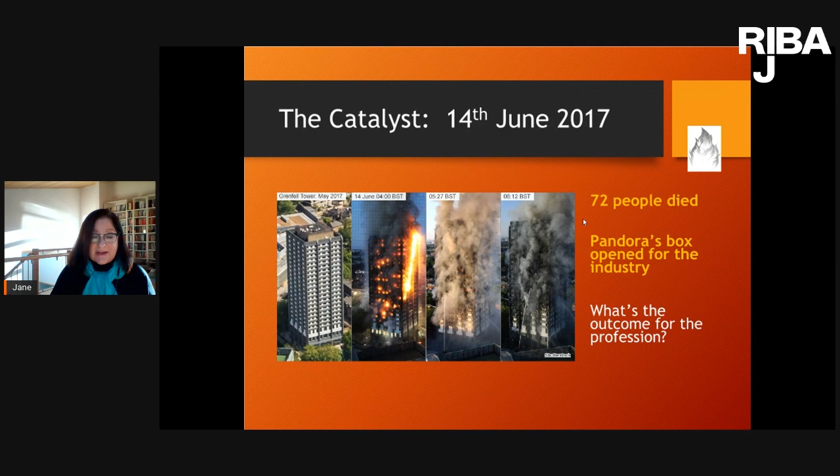So the background to this event, obviously, is we started a year ago with a roundtable discussion, a fantastic discussion with a very broad cross-industry group, and three issues emerged: PI insurance, still a big issue; procurement and responsibility, still big issues; competence, even bigger. So we really got it right in November 2020, and it's ongoing.

Next, please. Then there were follow-up Q&As in articles in the RIBA journal in February, March, and April, tackling each of these topics, so I hope you've read them. Insurance exclusions, well, we know about those. Shoveling off risk, and this is an area I feel very strongly about - architects actually need to shoulder some understanding of what the risk is and be able to talk to clients. And then rebooting construction in terms of its competence. Critical subjects. Let's move on.

So what is the problem? I mean, should we really be worried? Yes, we should. I put it as a juggernaut. The world for architects and most of the construction industry is changing and will change. The key changes are the Building Safety Bill, which is enormous potentially. Competence requirements for everybody in the industry, and you'll be aware already of what's happening with architects. I'll talk about that in a bit later.

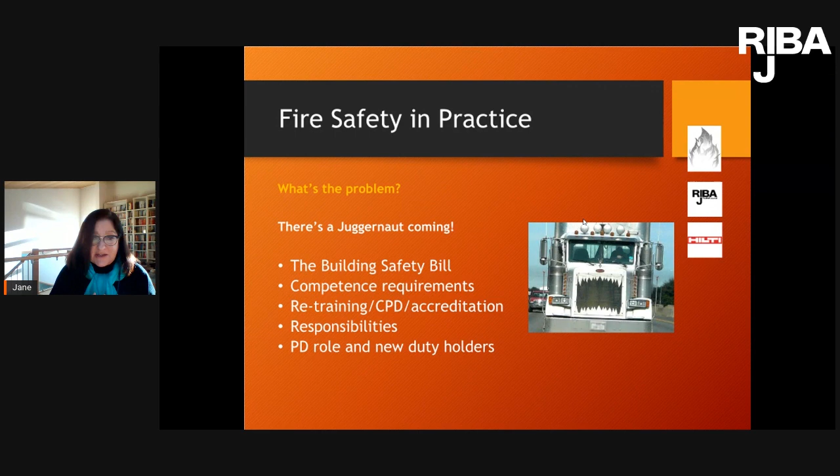So this is just a bit of quick timing for you so you understand where we are. The Building Safety Bill had its second reading introduced July this year, so not very long ago. And we've been told it's about a year until it gets Royal Assent, so probably July 22. And what we do know, of course, is that we are going to have at some point soon Gateways 2 and 3 will be explained next year. You're probably already aware that Gateway 1 has already been introduced in August this year.

Now, phase 2 of all of this is going to be about information from secondary legislation. And the issue with the Building Safety Bill is it's a series of aims, really, without an awful lot of detail. And the detail is being discussed at length. The RIBA and a lot of others are involved in that to try and make it work for everybody. But the information on that probably isn't going to be with us for a further year. And then in phase 3, for the last 6 months of 2023, hopefully no longer than that, we'll go through a transition period where the regime will be enforced and everybody's going to be feeling their way through it.

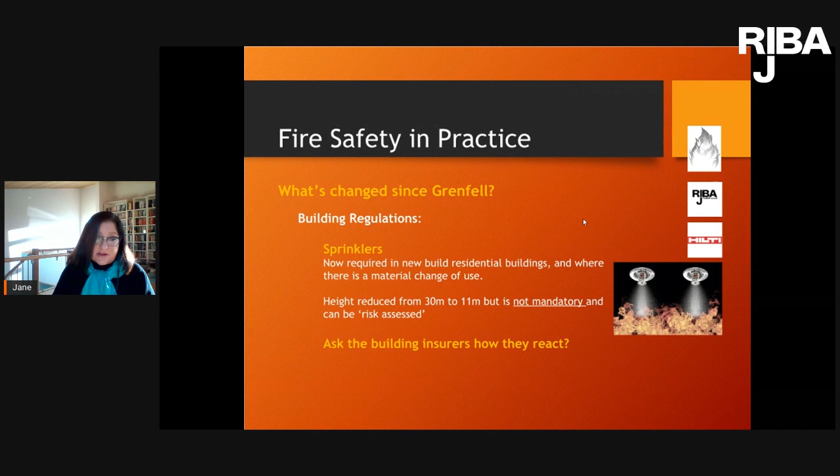And so this to me is not actually good enough. If you need to have prescriptive regulation, you can't have it not being mandatory and somebody can argue their way out of it. And we've definitely been hearing from insurers saying, how are we supposed to insure a building if we don't know whether or not it's adequately specified with protections? Next, please.

What else? Well, the stay put policy, everybody knows that was really, really difficult. It failed at Grenfell. And it's not really surprising. I've got a little photograph there of a trial where we have people coming down the same staircase that firemen are going up, and that's even before they've put their huge pipes full of water up these staircases. You can't have a single staircase, as we did in Grenfell and as are in many buildings, old buildings, refurbished buildings, and unfortunately now new buildings still going up with a single staircase. If there ever comes a time when you need to evacuate people, it doesn't work, and many people died in the stairwell, and I must say the insurers don't like it at all.

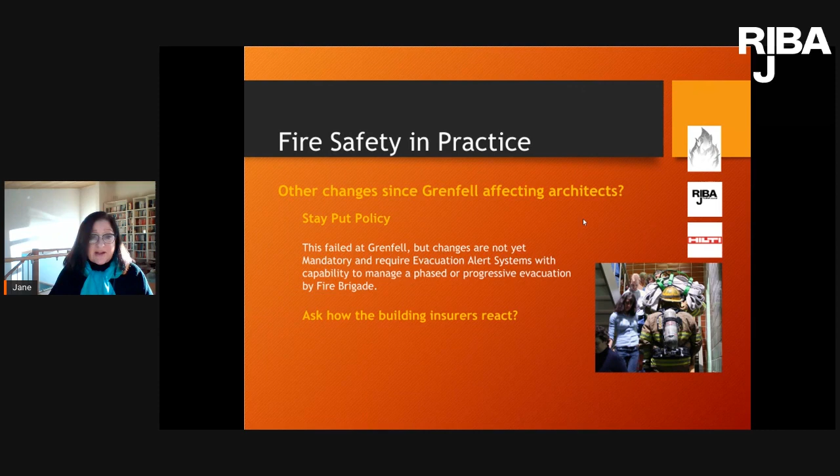And what else? Well, there's the Fire Safety Act. This actually was about having fire risk assessments for residential landlords and making sure that the flat doors and the external walls and all the common parts had a risk assessment. I mean, it's just common sense, isn't it, really? But I put the point in - he's quite right. You are going to need to have a design specification, because otherwise, how do you know what's where and what needs doing? So there's a really lot of work to do here.

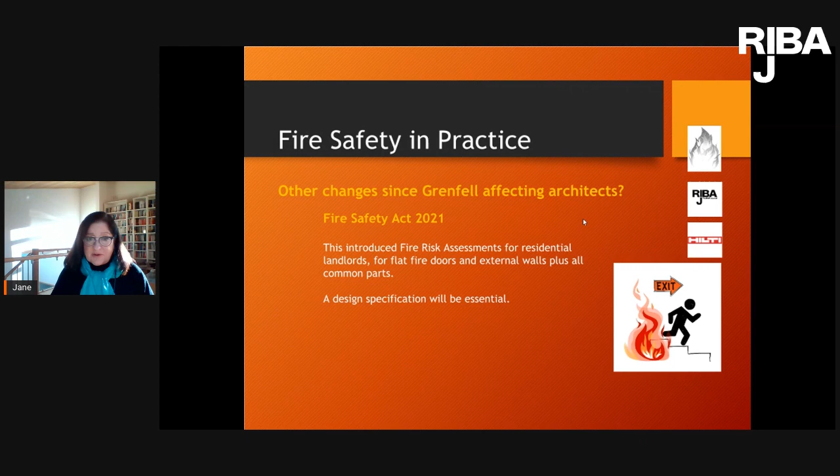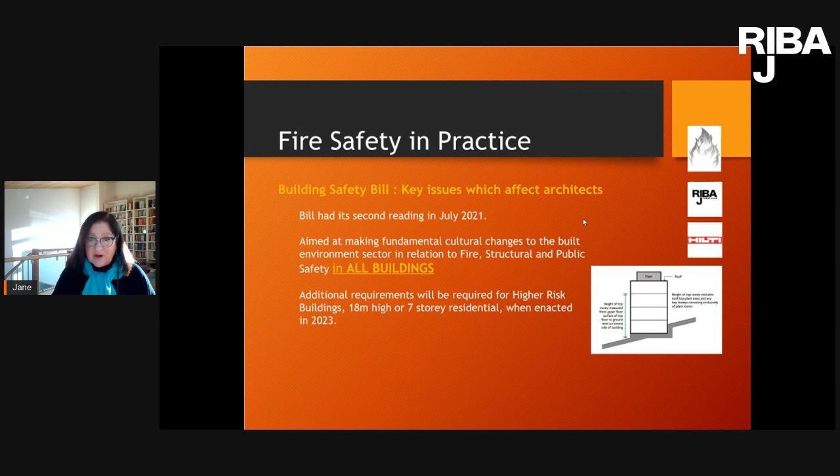And then we have the Building Safety Bill. This is all sort of sequential. It had its second reading in July 2021, and the general gist of it was making fundamental cultural changes to the built environment sector in relation to fire, structural and public safety. It's a huge thing to do. But what a lot of people don't realize is that the Act and these cultural changes were to apply to all buildings, although there are additional requirements for higher risk buildings, those 18 meters high or 7 stories above. But all buildings are really in scope of the Building Safety Bill now, so we need to be aware of this.

Well, we're at planning stage 1 gateway, which is relatively straightforward, but a fire statement is now required by legislation from August this year. But we have a little bit of difficulty because the system for the building safety regulator isn't really quite there yet. So I'm not quite sure who's going to be checking the fire statements, but presumably there's something interim in place. I'm afraid I don't know it. Maybe Paul will be of help with that one.

One of the things that came up in this July reading of the Building Safety Bill scared the pants off me, my expert panel, and a lot of other people in the industry, because they were proposing to adopt changes to the operation of the Defective Premises Act. It seems to make some sense unless you read the detail, where it's allowing owners and leaseholders to literally sue anybody connected with provision of a dwelling not fit for habitation. So this is everything: refurbishment, works to homes, not just new homes but existing homes, change of use to homes, and 15 years worth of house alterations and extensions were and are in the frame.

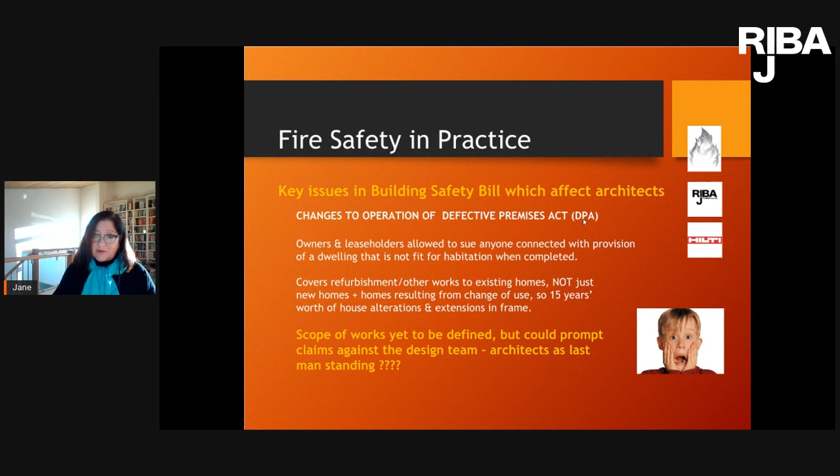But we haven't yet got the scope of works defined. We're very worried this could prompt claims against the design team. I've been personally involved in one scheme, luckily not too many, where as architect for a project I was literally the last man standing. Everybody else had disappeared off the face of the earth and collapsed their businesses or whatever else they needed to do. And although none of the requirements of this were directly pointed at me, my PI insurance had to cough up because nobody else was there. I can see this happening unless something changes with the Defective Premises Act. It's pretty scary unless we can change it.

So this is the key thing everybody's worried about. Everybody's practices are having a bit of a hiccup. No doubt you've been affected, because I think everybody has been. If it isn't just the rates, the insurance going up, it's the ability for practices to get the right insurance, and there are lots of exclusions, which I find totally unacceptable. But of course, if we've suddenly got to have 15 years for claims to be dealt with, and this is retrospective from next year, I've no idea how that's going to be coped with, and I hope the government will listen and just say you can't do this, it's not possible, because it's going to have a huge impact on our liability and ability to practice. So I think this really needs some thought.

You can see we're in a bit of turmoil with all of this, but there's one or two things we know are going to happen. The ARB is going to have a different role. It's interesting—they're going to have new powers from government to monitor and assess the competence of architects all the way through their careers. They're talking about a 5-year refresher test from 2023. I think we'll all probably retire by then, won't we? With possible deregistration as an ultimate sanction if you don't do what you're supposed to. And they'll have powers to publish disciplinary orders against an architect, taken by the Professional Conduct Committee. It's not dissimilar to what's happening now, but the government have been working with the ARB to determine the length of time a disciplinary order can be listed on the register. And of course, that does affect people's livelihoods.

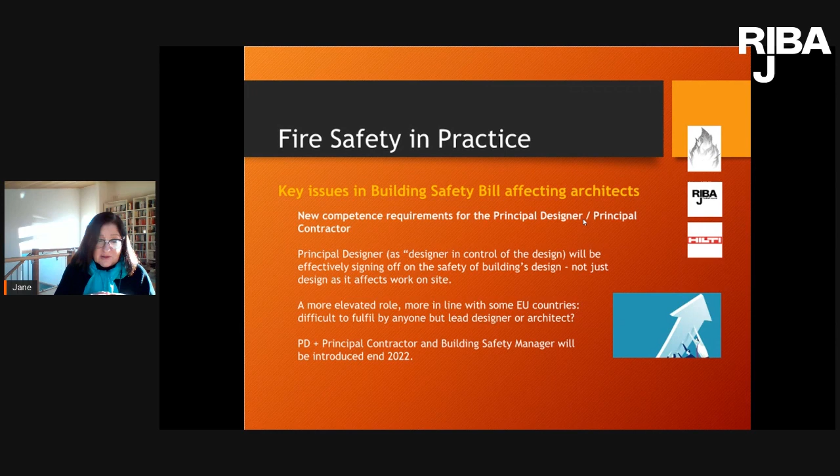So, what else is coming in? Well, competence. Competence is one of the biggest issues in my book, in particular with the principal designer and principal contractor, but actually competence is a bigger topic than that because it affects everybody in the industry. And I think although everybody's talking about individual professions or individual roles and the competence required for those, there's another one we could talk about, which is competence in terms of collaboration. How do you become competent in managing other people to the point everybody is working together to bring truly professional management and an end product which is fire safe and keeps the public safe? Difficult topic.

So it's really going to be tough. This is just a really quick view of it, but it is going to be a difficult one for architects. Actually, it's going to be difficult for everybody. Everybody's going to need training. There's going to be the building safety regulators with oversight on everybody, and we've all got to do our CPD.

Everybody in the industry has got to look at procurement. The issue is the procurement is quite simple. I mean, the difficulties with procurement have, in my view, driven down costs to the point where quality has gone out the window long ago. That's got to come back.

We've got to have smart procurement, sensible procurement that will make sure that the buildings that are created or amended, adapted, retrofitted, whatever's going to happen to them from now onwards are actually fit for purpose. And purpose means not just that they're going to make enough money for their developers, or be cheap to run, but will actually be a legacy and be safe into the future. Otherwise, the insurance industry is going to turn their back on us, I think.

Right, next slide please. I'm nearly finished.

This is something that my expert panel at the RIBA is very keen to keep pushing the government on, which is the need for clear, prescriptive regulations, a baseline everybody has to follow, without the potential for people to worm their way out by using parts of the guidance which are not clear, or bringing in specialists to do special computer packages to mean you don't have to follow regulations. I don't know how people have managed it before, but it just seems to have become the thing.

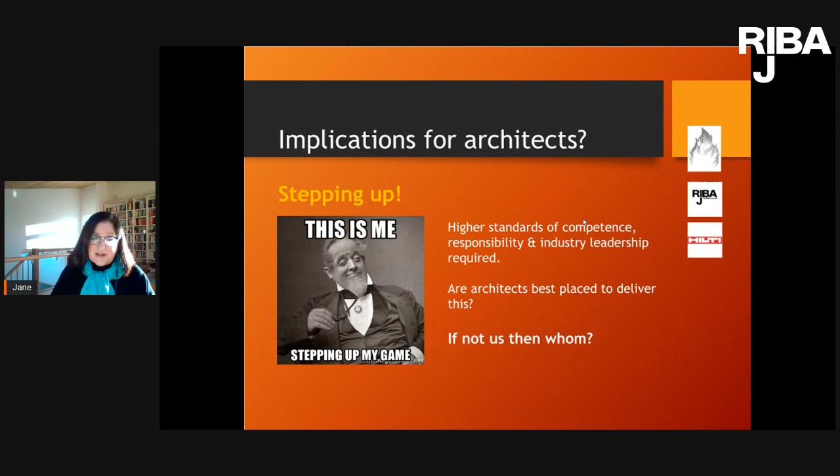So there's lots to talk about here. Let's discuss it. Thank you very much.

Thank you so much, Jane. I always really enjoy listening to you speak about this legislation that's coming into play, which is underway, and really being able to draw the audience's attention to it. These are very, very important changes being made to our industry.

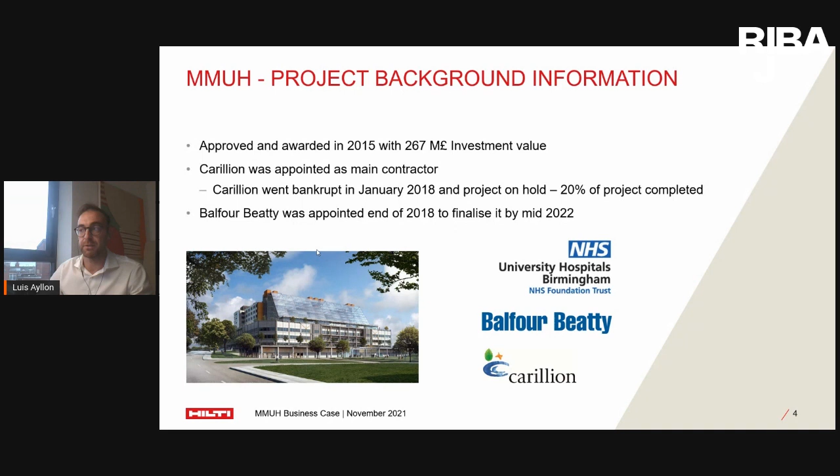In terms of the different parties involved on that project, and currently still involved since it's not finalized yet, as an architect and principal designer in this case it was HKS, Balfour Beatty as main contractor, and Curtins Consulting as structural consultant. I'll try to reflect why I'm including the structural consultant here as well.

In terms of Hilti, how did we get involved as a manufacturer? We got involved at the beginning of the project, and then decided with the main contractor and the architect what the scope of works would be. A very early definition was quite important to come up with a successful outcome from the work put together by the different parties.

Going strictly onto the design stage, what was different? From the main contractor's point of view, it was agreed with Hilti on the definition of the boundaries before the M&E or services design was carried out. I'll explain this in more detail, which will give you better knowledge of what I'm talking about.

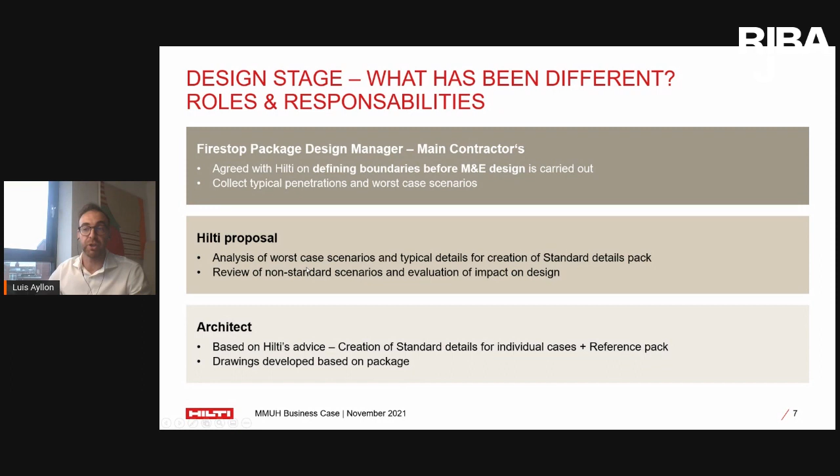Then, looking at the traditional design flow when it comes to mechanical and electrical, focusing on overall fire protection - when it comes to the normal or traditional flow of the last years, which is slowly changing in the industry, we start with the concept.

What is the number of services that we need for the project? That's based on the different service types, the number of beds needed, what the waste and consumption will be, and other specific requirements.

Then we move on to what type of services we'll need - number, type, size, volumes, etc. - and then how the main corridors and plant rooms are going to look. That's fairly common and fairly easy to start the design for any single project, whether residential, hospital, etc.

From there we move on to a spatial and openings configuration, and we define - or traditionally have defined - the multiple services penetrations with the supports, pipe and cabling needed for electricity, and then roughly figure out what the opening sizes will need to be in these cases.

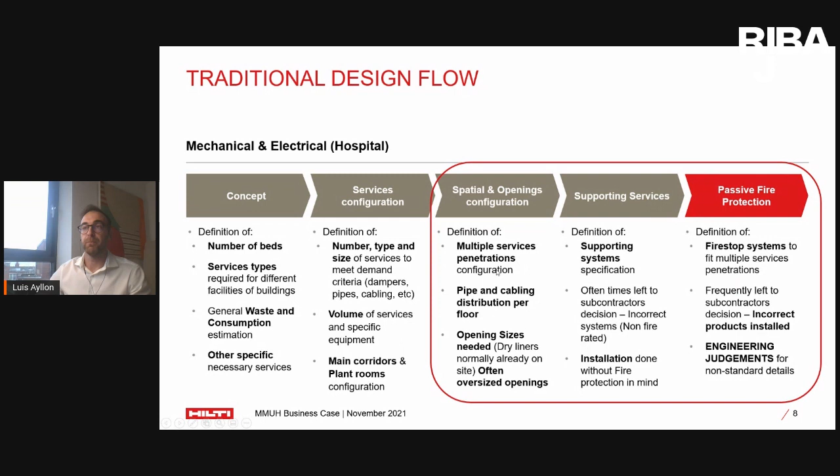So far this has been a traditional design flow. What's been different in this project is that we went all the way through from the concept and service configuration, which was part of the traditional method as well, but then moved passive fire protection design from the bottom of the chain to the intermediate stage, agreed between the main contractor and the architect.

That was to actually define the boundaries - what are the limits of the products, what is the product tested up to, how big are the openings covered by those products. We set those limitations, then produced solutions and identified which were the possible ones.

From there we started to define how the spatial configuration and openings on site should be limited to, in terms of openings no larger than a given size, and no more services grouped together than specified. Those are the ones that go after the design or selection of these passive fire protection elements.

Last but not least, the supporting systems we use to put all of this together. Of course all those supporting systems need to be according to fire requirements, so they need to be fire-rated supporting systems as well. Installation has to be done according to the passive fire protection manufacturer's instructions, and also according to the supporting systems manufacturer's instructions.

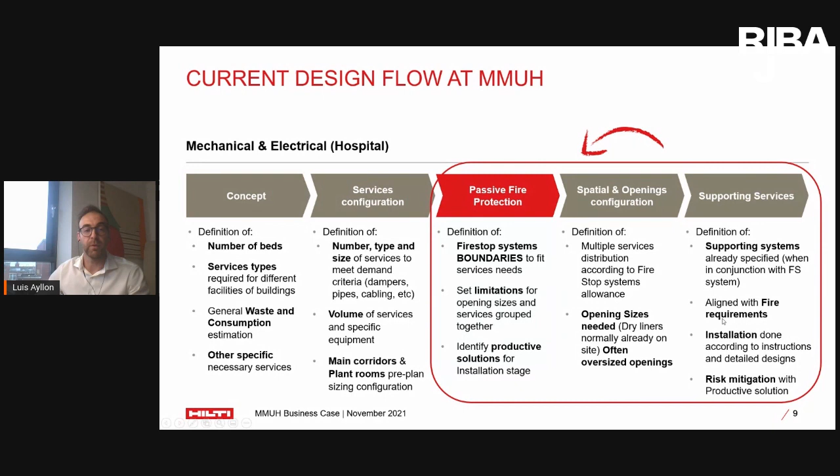That was the last part of it, from which we could evaluate and run a risk mitigation exercise to understand the different parts and make sure we don't end up with as many engineering judgments as we had in the past.

So in essence, starting with a clear definition of passive fire protection boundaries - the limits, what falls under the standard detail, what falls under products that have been tested - we can then make sure the mechanical and electrical design fits onto those fire stopping limitations.

Then together we reach the final stage where we see that 90% of the applications, 90% of the penetrations, can be covered with a standard detail, with an element tested for this application. We take all of this forward - this 90% is correct. Then what happens with the remaining 10% not covered by the current testing data we have for those products?

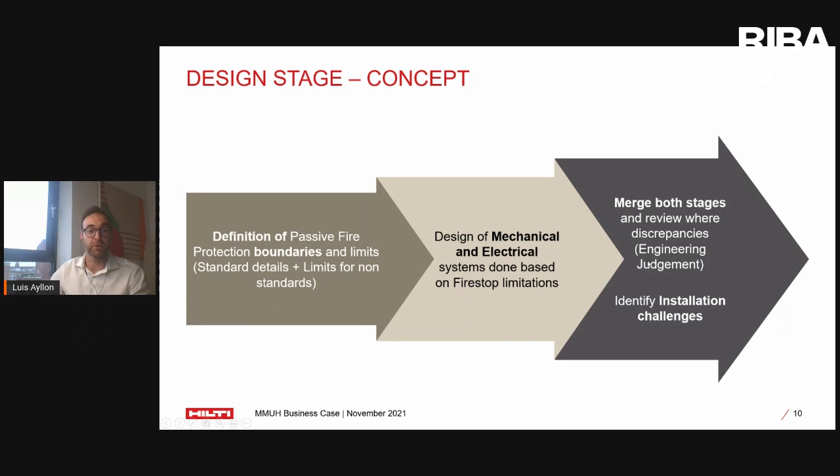That's how we came up with this standard detail spec that we put together for the architect and the main contractor. We defined it starting with single penetrations, and also for flexible wall systems, plastic pipe, metal pipe, always giving different options for different types of pipes and elements, and materials for cabling too - giving a couple of options with a figure or number reflecting these standard details, so we can refer back once we move onto detailed design. Same for concrete wall, single services, multiple services penetration, and concrete floor as well.

Here, without going into too much detail, I refer back to the structural engineer, who will probably also have to be involved in some of those risers where services have to be fire stopped, and where the fire stop manufacturer has to work with the architect and the structural engineer to come up with a solution.

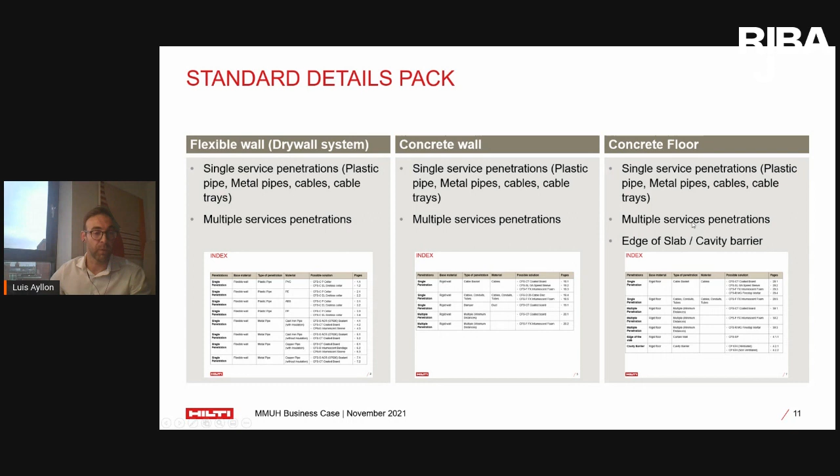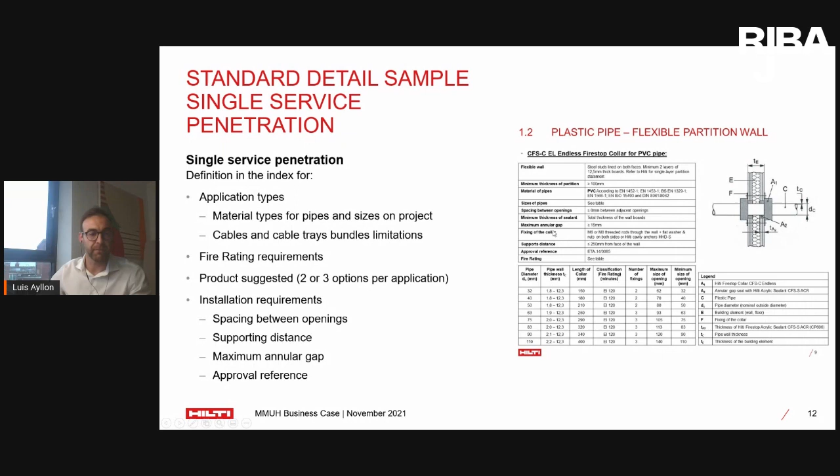Early engagement is also something that will save a lot of engineering judgments and remedial solutions further down the line. As an example, you can see here what one of those standard details looks like. Those standard details were used from the architect going through the main contractor and also all the way through to the installer, because it contains all the information needed for the different types and sizes of pipes, the approval reference, supporting distance, maximum - in essence, all the necessary information for all the different parts involved.

Looking at how a multiple service penetration would look like, we would take one example, and we would define all the different conditions that have to be met in order to actually be able to implement this standard detail in a possible opening that we would have on site.

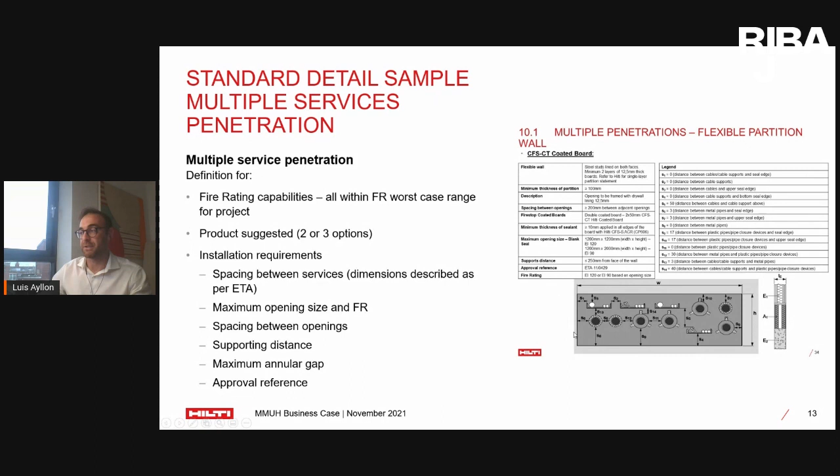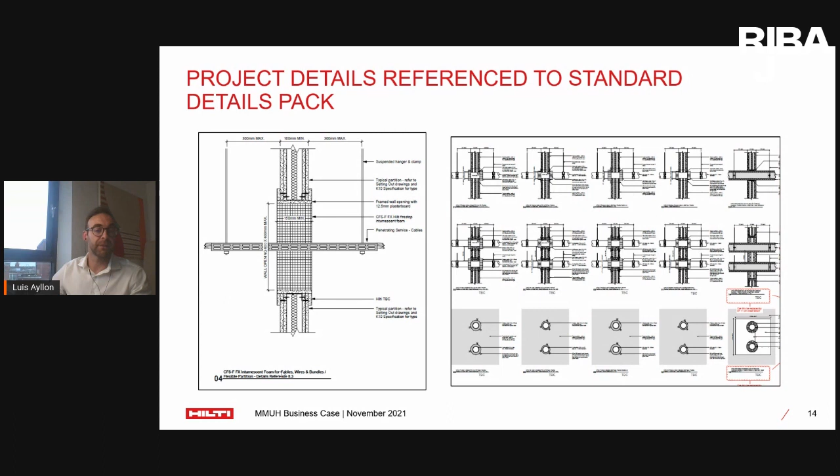And that's how then, moving on to the detailed design, is being referred back. So this is an example of specifics about the project that are being referred back to this standard details pack. So everyone, again, from the architect, main contractor, and then subcontractor or installer, can refer back to any detail that they will need during the installation time, for example.

Now, non-standard details, and here's where this 10% comes into the scene. By actually getting early involvement onto the design, we've managed to move from roughly half of the applications being remedial solutions to roughly 90% of those applications being standard tested details, standard applications that we don't have to look onto engineering judgments for.

But there's always things that have not been tested that will go out of the normal scope and cannot be met with the current testing data that the manufacturers have. That is where we can come up with something specific that can meet the worst case scenario for those situations with multiple services, with dampers, with movement, etc., where we can put an engineering judgment together, evaluating and assessing the situation, and also provide a full system approach.

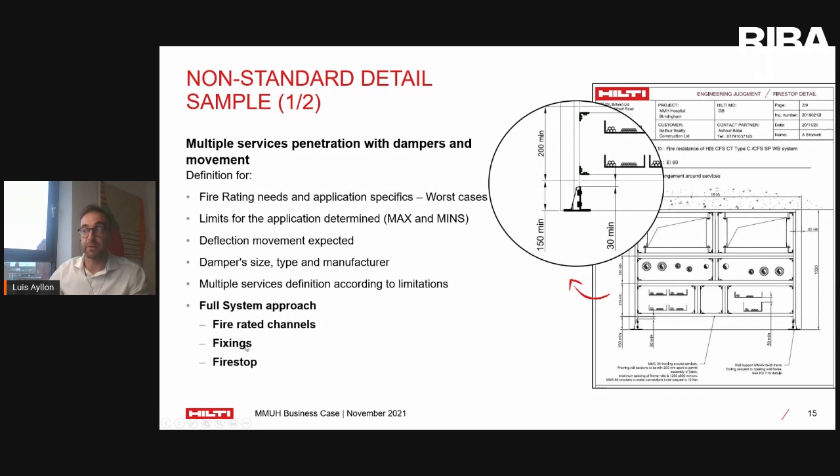That means that, for example, for this type of application, which is an above-door system penetration, where you've got dampers, you've got deflection movement, pipes, cable trays, etc., we can come up with a solution which is fire compliant. It also has fire-rated channel systems, which is also compliant with the fire requirements, and also fixings, because fixings have to be fire-rated to have a proper fire-rated overall application.

And that's how, for example, we would deal with movement in this case, putting some movement accommodation with specific products that, based on test data or test evidence that we have as manufacturers, we can come up with a solution. That is always proposed by our fire engineer, and that's something that goes through an exhaustive process of checking and review.

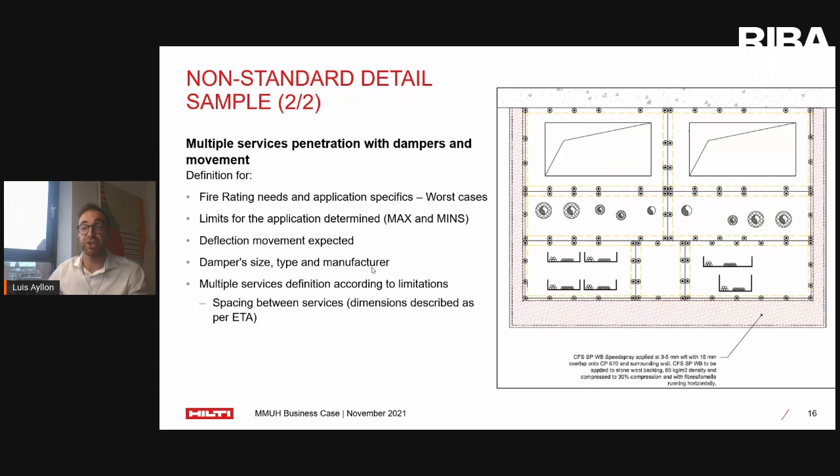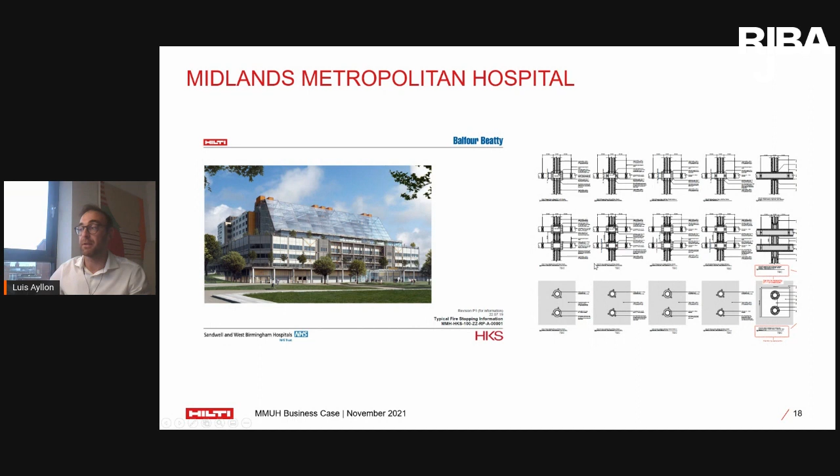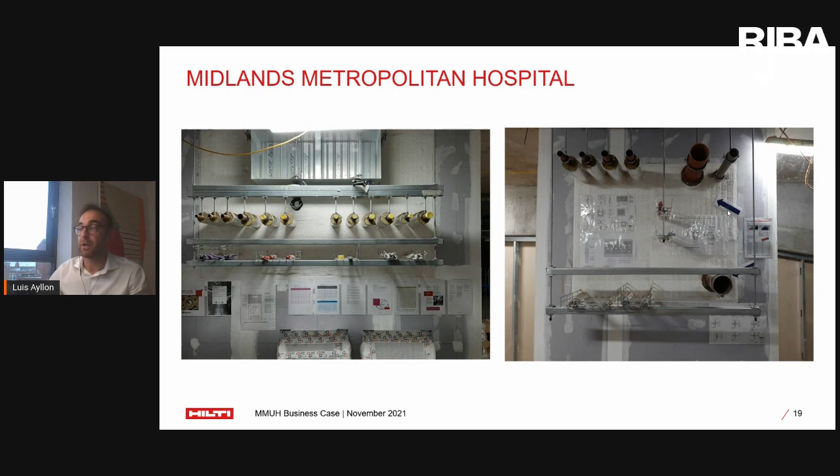Results. Again, going from the design, that was the standard details pack, specifics for the different applications, the different locations on site. Then mock-ups that were created on site with the specific details referring back to this standard details pack. So everyone who had any question about how to install something could refer either to those mock-ups installed on site, or go back to the standard details pack because there is a specific reference in this detail. Going all the way through to training as well.

I think I can spend an extra minute emphasizing the fact that Hilti as a company, we haven't been doing this for just a couple of years. We've been working with yourselves, with architects, for many years, way before the tragic events happened a couple of years ago. We've been working that way, trying to collaborate with architects, getting involved in early design stage with main contractors.

Now, more and more main contractors want to do this early engagement with Hilti or the fire-stop product manufacturer in this case, and also even clients, even the proper clients or owners of the buildings - they are the ones that want the manufacturer to be early on involved on the design stage, so everything gets designed properly, and then we don't go further down the line and try to use remedial solutions for things that could have been avoided early on. And that's it from my side.

I hope that it's been brief but useful for each one of you. I think the key takeaway is about changing the mindset of not letting fire protection be installed, designed, or determined at the end of the chain, but taking fire protection as something that limits the way we do most of the design in a building, dictating how the services should go through so they fit within fire test data from a specific fire protection material.

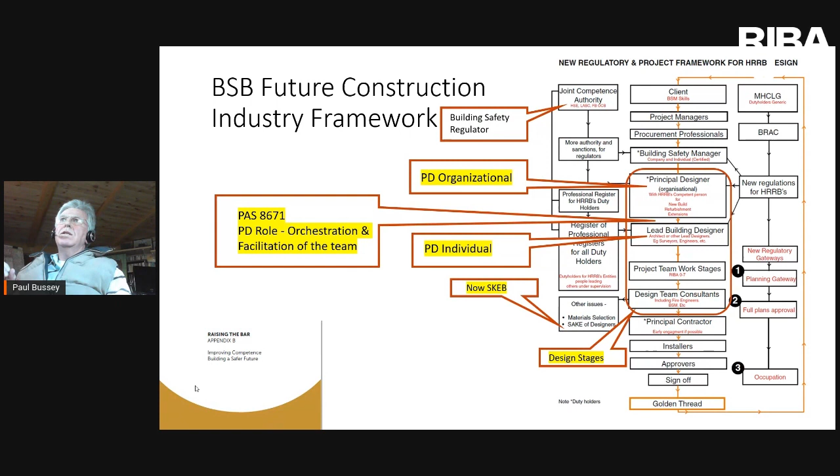Jane mentioned the Building Safety Regulator. They are currently forming themselves, and they need 700 new appointees - they've apparently got about 100 to 200 so far, so there's still a process ongoing. Currently, local authority, HSE in theory, and the fire brigade are all supervising what's required, together with approved inspectors who are coming in to help with that process, because there's a lot of expertise out there. So increasing visibility during the next year, relying on the local expertise of the regulators that are out there. They're all getting trained up, I assure you, to higher levels.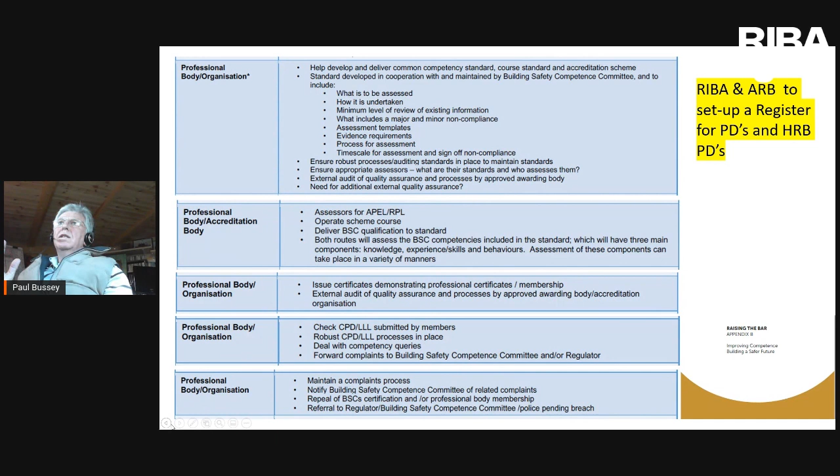Architects will need to up their skills, knowledge, experience and behaviours. It used to be SCET with training in CDM, but they've dropped that. There's still training required, but behaviours is fundamental, and people have to demonstrate that they are competent. That is the point - not just to say you are because you're an RIBA member or you've passed your Part 3, you've got to keep up with those standards. So there's these expectations of everybody in this overarching competency framework.

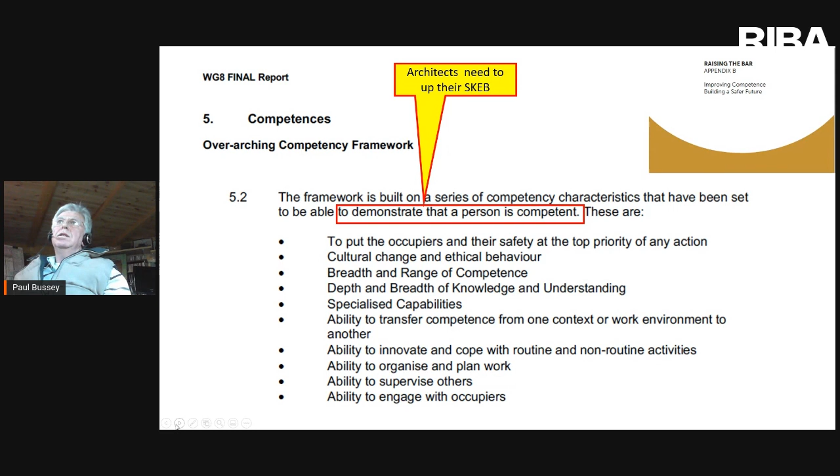So the way ahead, again Jane mentioned this, and you'll see down the right-hand side there that we're looking at actually getting health and safety wellbeing with the general level for architects, and then advanced study for all buildings, RIBA Principal Designer course, and then there's a Principal Designer for HRBs, which has some additional expectations. It's not that many more, to be honest, so the expectation on all buildings is pretty high, and I think there's 3 extra duties for HRBs - higher risk buildings, which will not only be necessarily 18 metres and 7 storeys, etc.

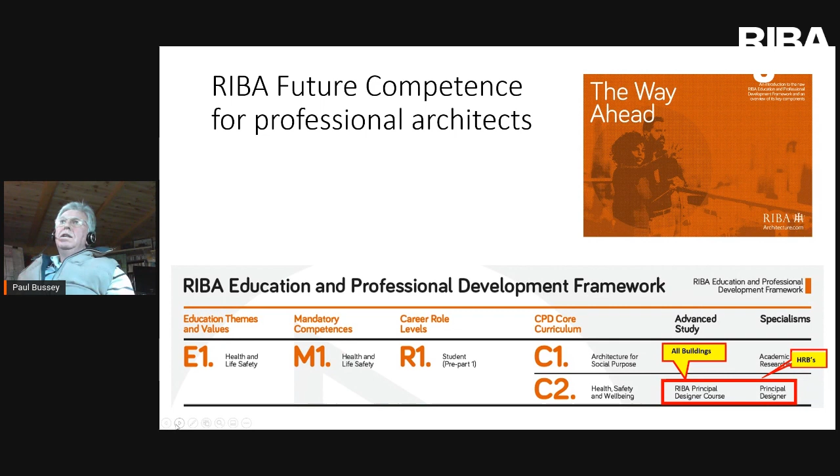So Building Safety Regulator, as I say, the new name, it was originally the Joint Competent Authority, and Peter Baker is heading up the organisation.

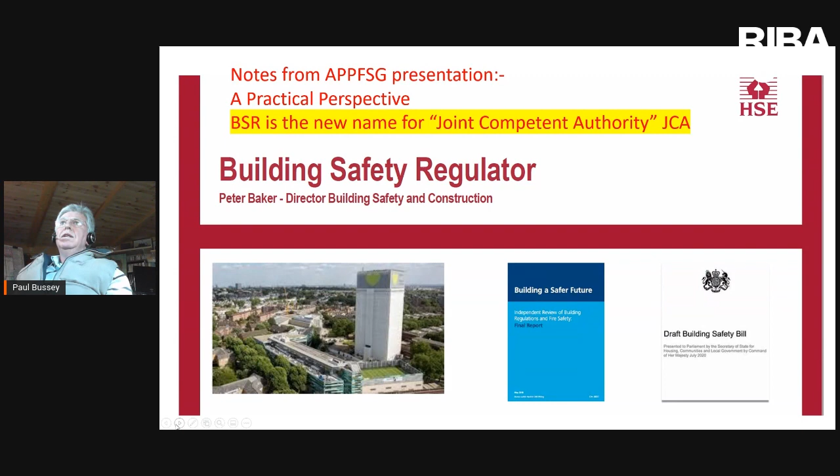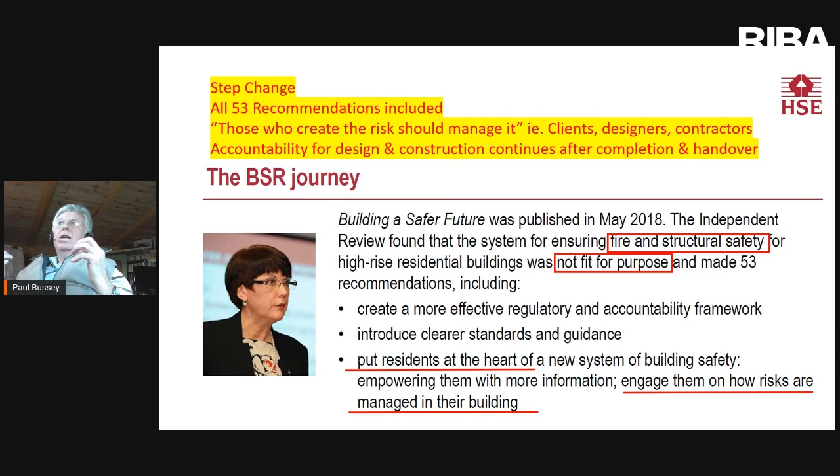So the HSE are really driving this, and all 53 of Dame Judith Hackitt's recommendations have been or will be implemented. And there's a famous quotation, she states, that those who create the risk should manage it. And her view is that clients, designers and contractors do so, particularly clients and designers in a way - we're creating something which has risks embedded. We need to identify these and manage them, particularly in terms of fire and structural safety, because currently the whole process is not fit for purpose, and putting residents at the heart of this process.

So there's an interim industry competence committee, which I've been representing the RIBA upon. We're getting there - it's quite a slow process because everyone thinks they know how other people should be competent. It's more difficult when you've got to do it yourself. So I'm really backing the architects within this group to try and make sure that we don't have the bar set too high. It's going to be a wide bar.

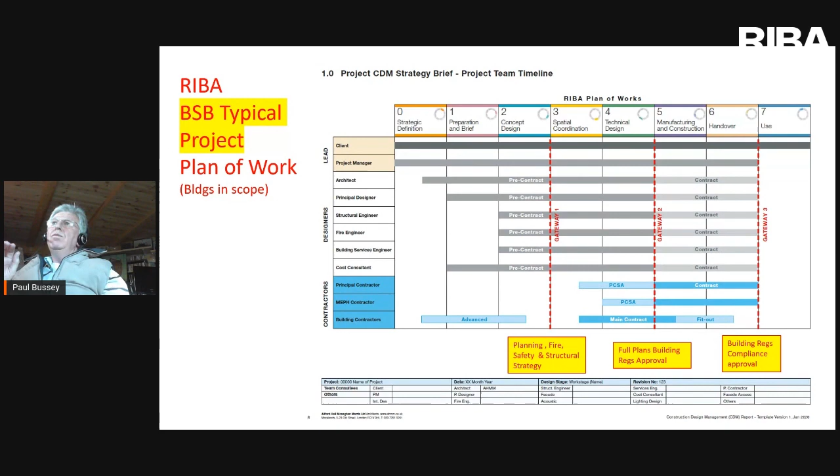So this is a little flowchart which just tries to show, in relation to the plan of work, what Jane was talking about - procurement, and trying to get within these new gateways, which in theory might well apply to all buildings in the not too distant future - but actually getting all the consultants appointed at an early enough stage to make sure they can meet Gateway 1 with a good standard of fire safety and structural design. And then Gateway 2 is going to be the next critical stage where we're going to have to get contractor input in. And I think everything that Louis has been showing us has got to come before that Gateway 2 dotted line, because we're going to have all the services designed to a suitable extent to be fire stopping them in the design that Louis has been showing.

Because after full plans approval, there should not be design change. Now, that will be interesting to know how that is going to be adopted, particularly under design and build. But we certainly know that by Gateway 3, that's got to be all sorted out. There should not be design change from fire and structural safety during that 2 to 3 work stage.

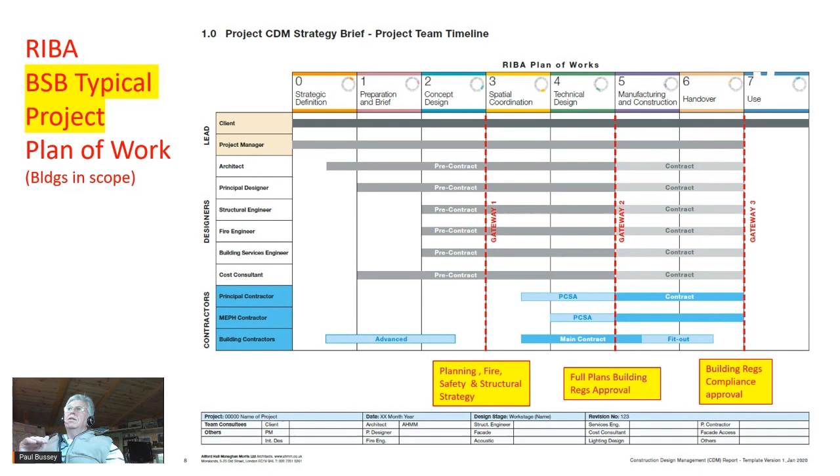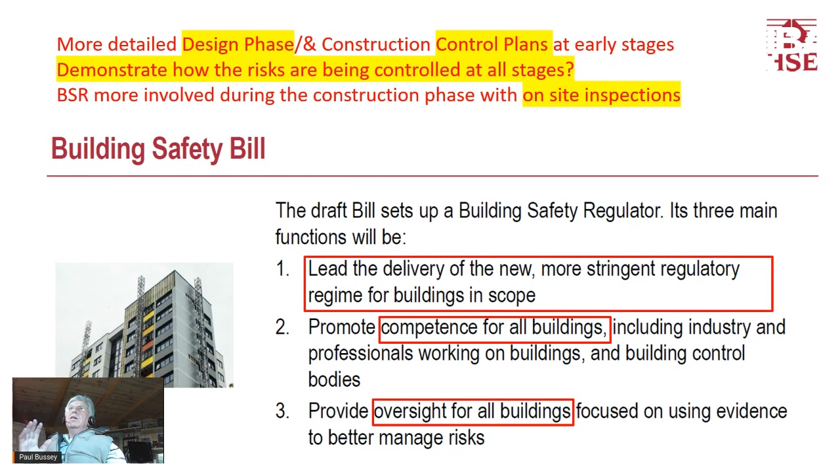So design phase and construction control plans are fundamental, and the construction control plan will potentially modify - could have to go back to the Building Safety Regulator if that happens. So there is, as Jane mentioned, a new competence required for all buildings, not only buildings that are HRBs as such. And certainly the introduction of more site inspections is going to be fundamental.

So the Building Safety Regulator is going to have a cost recovery regime. We don't know quite what that will be yet, but they've obviously got to charge for these 700 people they're appointing, and what they've got to do - that might be similar to the way CDM is dealt with, but I think there'll be more advanced consultation, a bit like the pre-apps in planning stages. So that has still got to be finalized.

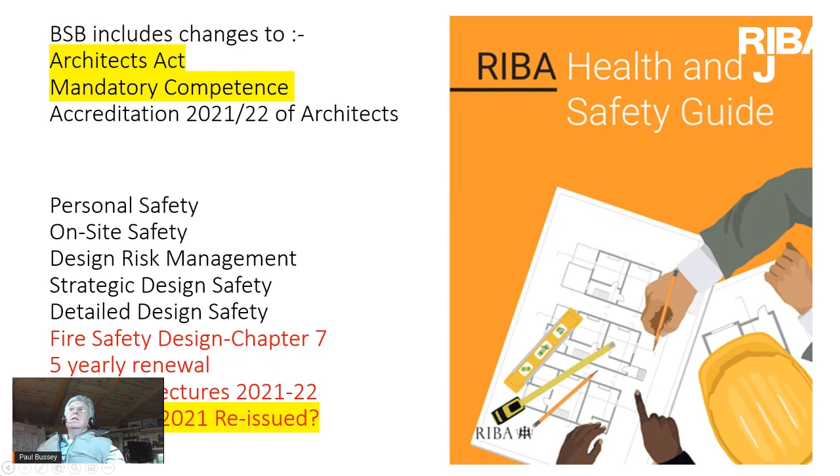The building regulations, as Jane says, we're strongly working with the new DLUHC to try and make sure we can get a comprehensive and comprehensible set of approved documents and building regulations, because frankly they're not fit for purpose. How can you have a regulation which will not necessarily meet the requirements? It's ludicrous, and a lot of countries abroad are absolutely aghast that we've got this system of complete ambiguity and flexibility, supposedly for creativity, but it actually creates more havoc than anything.

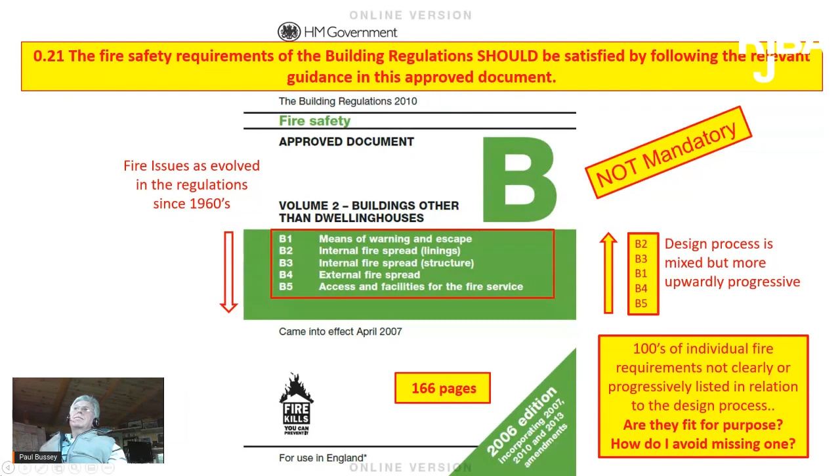There's a merged document we're referring to here, and a design process which is almost the inverse of the way the current approved documents are laid out, B1 to 5. Actually, from a designer's perspective, we've got to work from B5, 4, B1, 3, and 2. No time to explain that today.

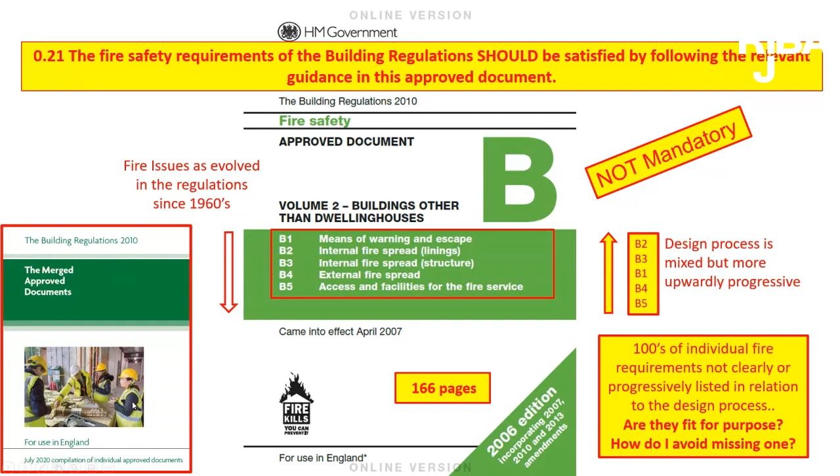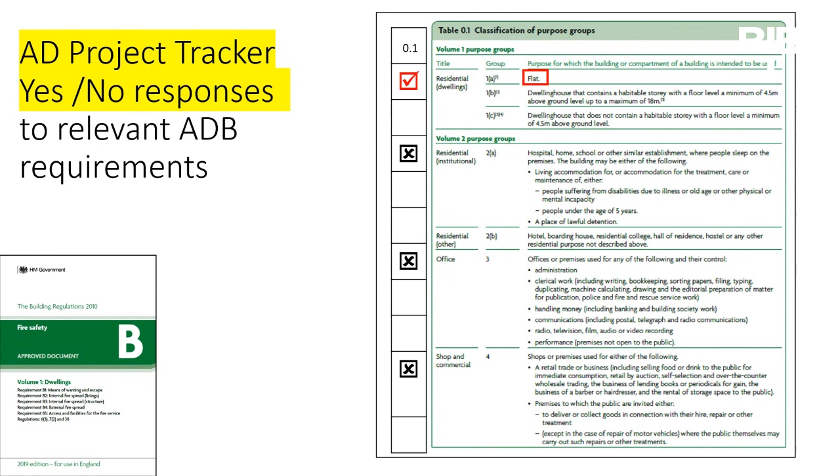We're looking at getting these 1,274 pages condensed into a document whereby we can actually say tick, cross, we're applying this, and we're not applying the others. And this diagram we're using, and that diagram we're not.

This is fundamentally useful to the building control, a designer and an architect 20 years down the line when there's a problem like Grenfell, and we can backtrack what on earth was designed, because it's almost impossible. I've had to do that for Grenfell.

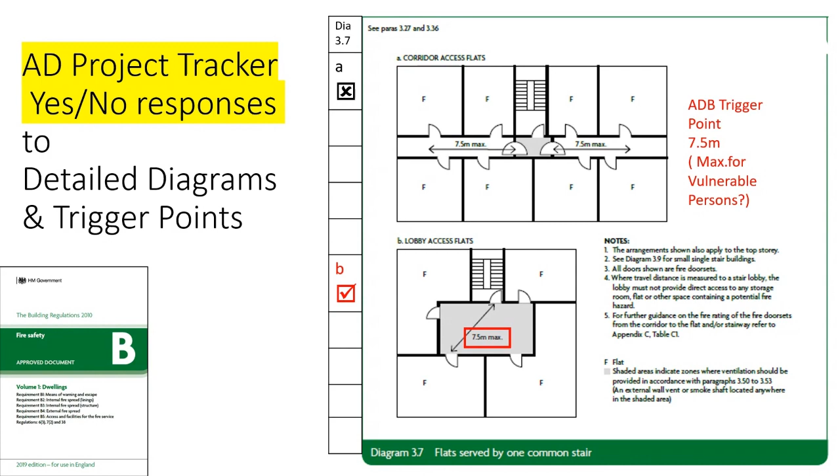When you start going to the British standards, if they're still going to be there as on my table to trump the approved documents, then let's say right, we use this diagram in BS 9991, and that was an alternative approach.

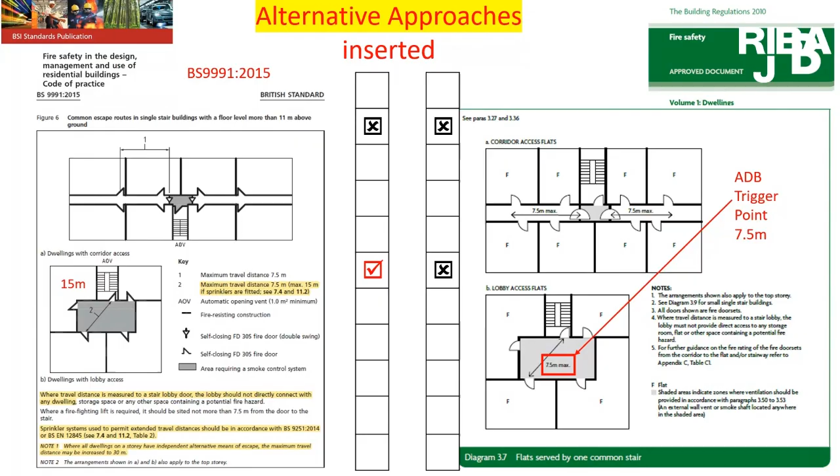Very simply, we're going to start introducing a lot more criteria that relates to vulnerable people, not just general needs housing for people who are fit and well, and the post-war studies with army squaddies running around buildings, but actually having people of this nature evacuating homes.

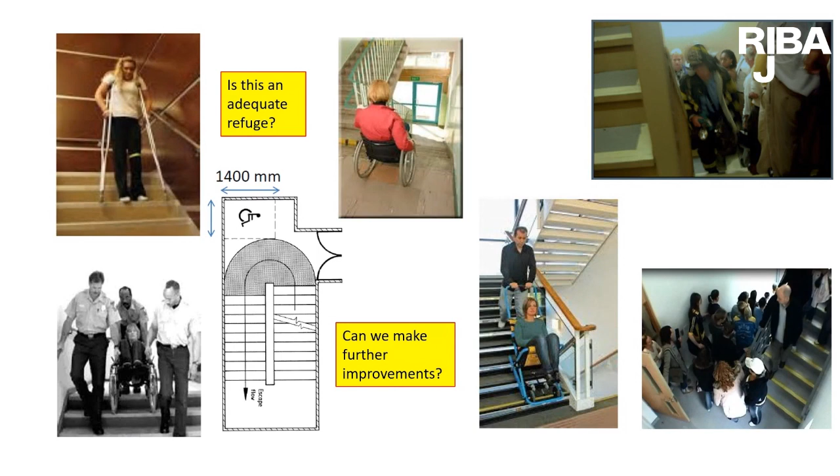Those of you who have ever put a person in a little square box in the corner of a staircase, I think really need to reevaluate that. Is that suitable when you've got the fire brigade coming up with their hoses and all that gear Jane showed earlier, and actually expecting someone to sit there and be carried down the stair? Don't think that's where we want to be in the future.

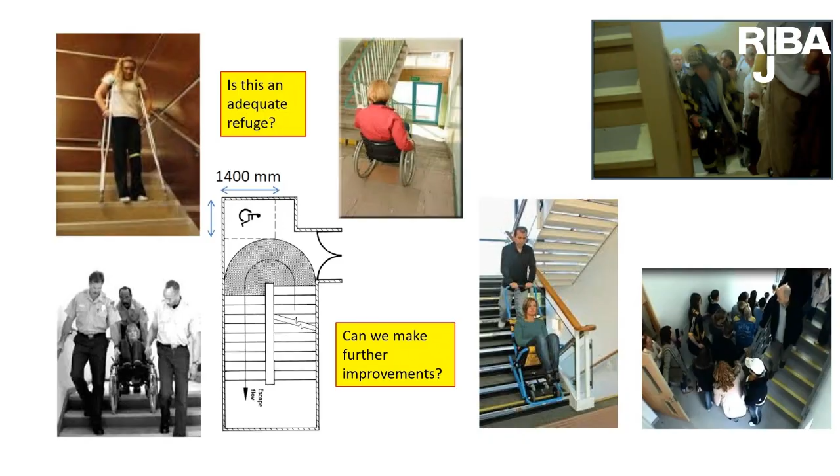Understanding in existing buildings what the existing fire penetrations, fire stopping and compartmentation actually is, not assuming that it's what was supposedly there when it was originally designed. We know that Grenfell, that wasn't the case. Lots of other buildings the same. This completely failed at Grenfell.

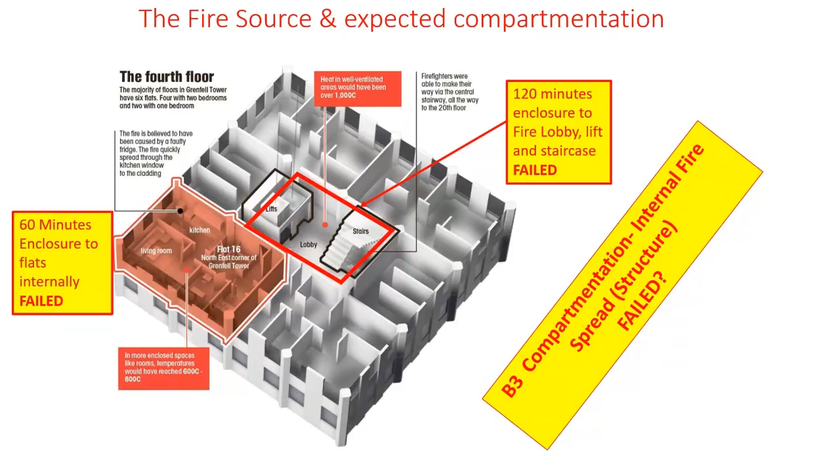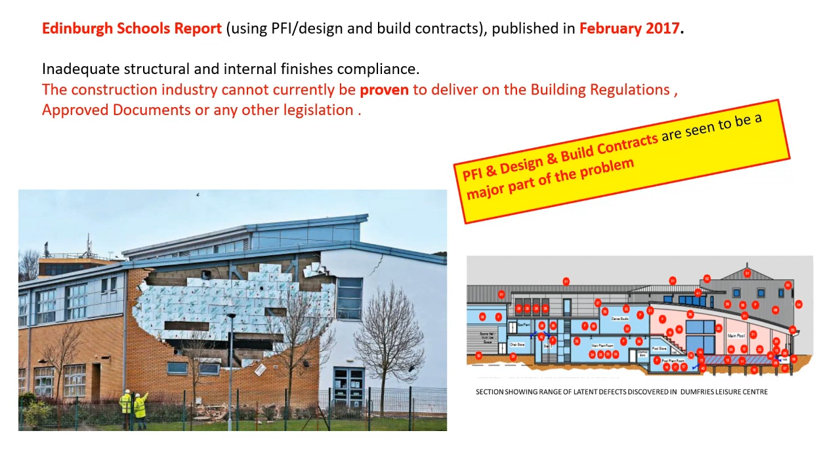Edinburgh schools fundamentally was a problem, and this wasn't just structural or fire safety, it's that construction safety was not adequate. The building safety bill, much to people's surprise, will actually cover other building safety issues, making sure all those little red blobs on the right hand side are dealt with in an appropriate way, and they're not defects that can last for longer than 15 years.

This is very much Louis' field. Grenfell failed massively. Lots of our buildings failed from services penetrations for all sorts of pipes, and we generally don't take much notice of those as architects. In the future, we're going to have to a lot more.

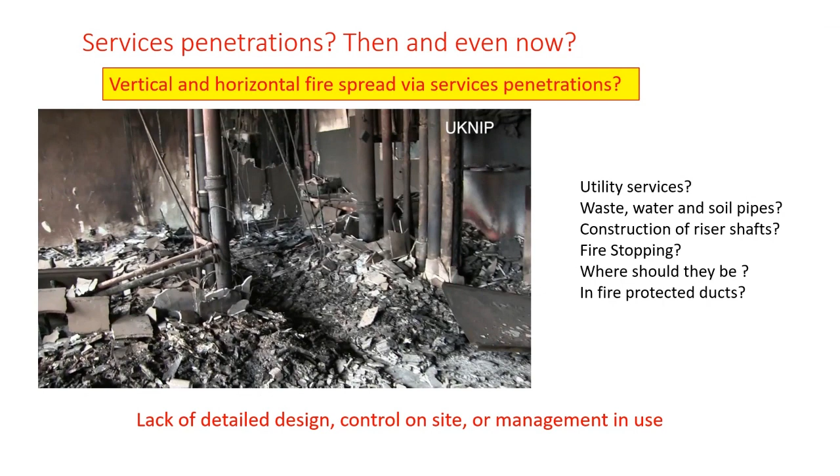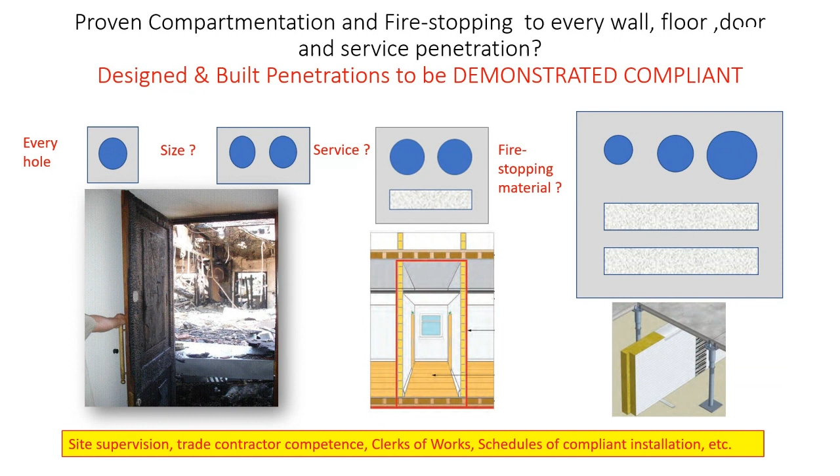We've got to identify all the other cases. Fire doors work well if they're a fire set, or door set. Corridors and compartments have got to be built appropriately, and any services that run through them, and any voids in the building. So we've got to design all these spaces, and we've got to demonstrate that we're compliant.

Clerks of works will be there to supervise these. There's more clear legislation at the moment, but there's still some gaps in it. Our colleagues at Allies and Morrison have actually shown some sketches to improve the current regulations, or the approved documents, but there's still a long way to go.

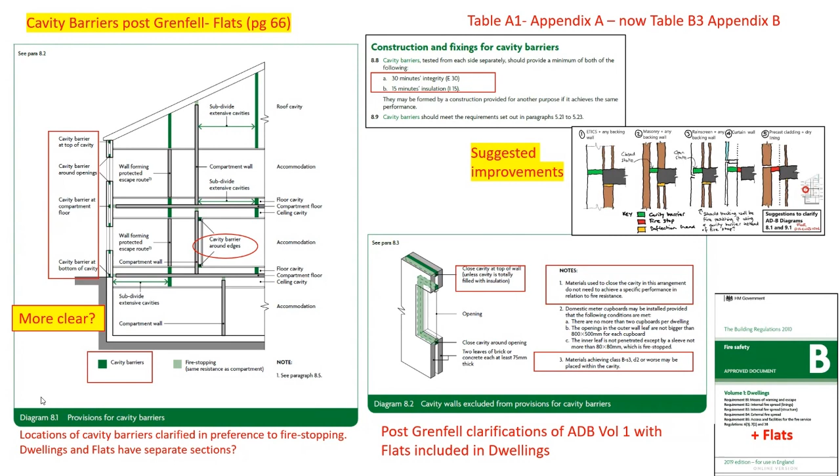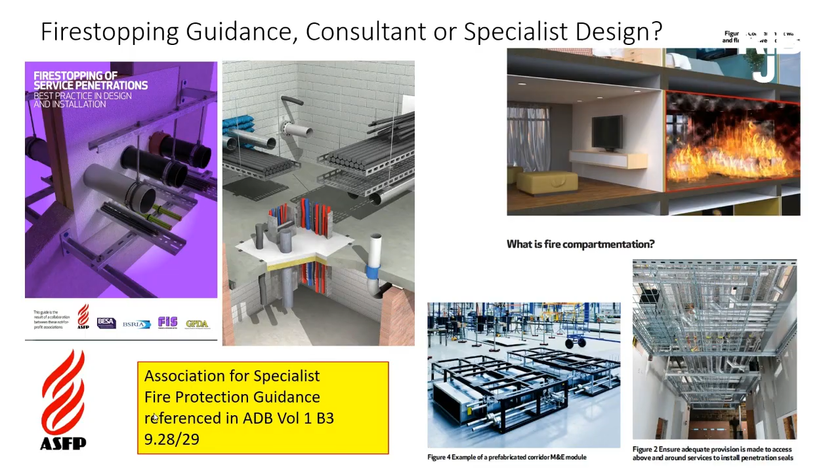You can work your way through that, but this is helping you as architects to understand it. I don't think we'll all be doing it ourselves. We'll be getting specialist passive design consultants, Hilti or others, involved in our process a lot earlier, and the MEP has to be designed a lot earlier to cope with this.

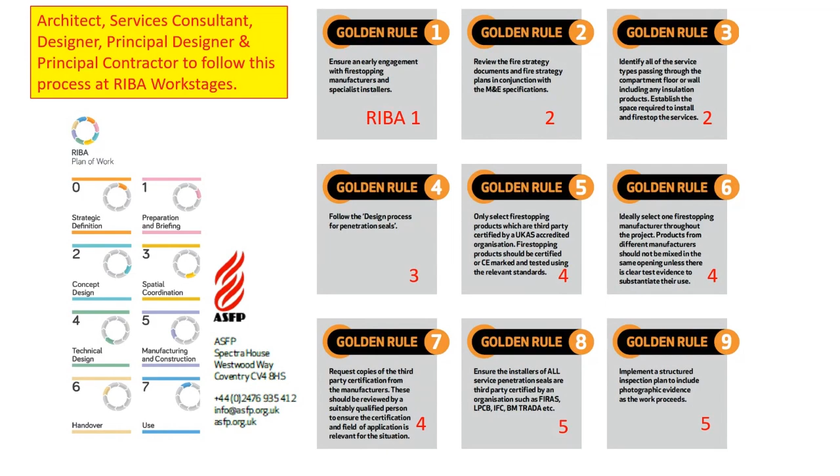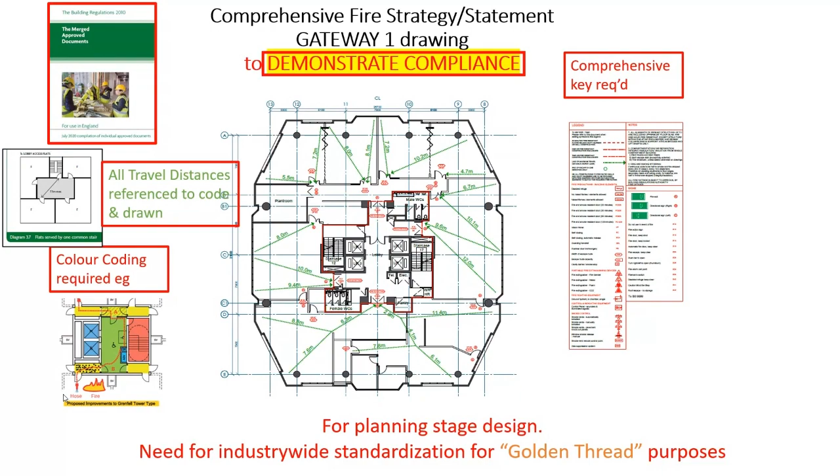Thank you, next. And certainly on refurbishment projects, it's fundamental that we understand the enclosure of the cores or other compartmentation that is taken as read as being already there, and an inspection of the existing services in the building. So that is fundamental, possibly cold smoke fire tests in existing buildings.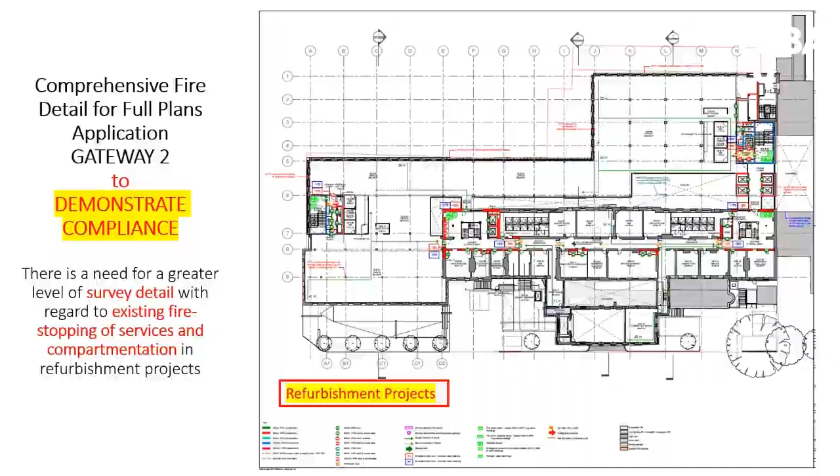Next. So this is to get through Gateway 2. We're going to need this level of information, a legend which perhaps is used across the whole architectural profession. It'd be interesting if we can get our act together and do that.

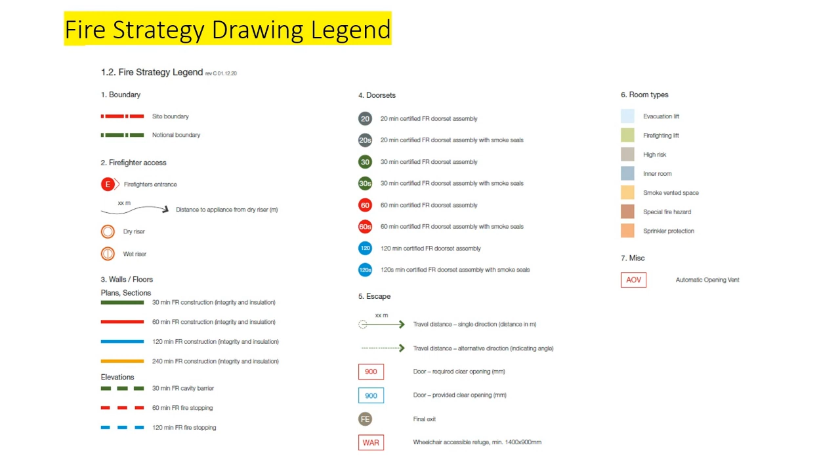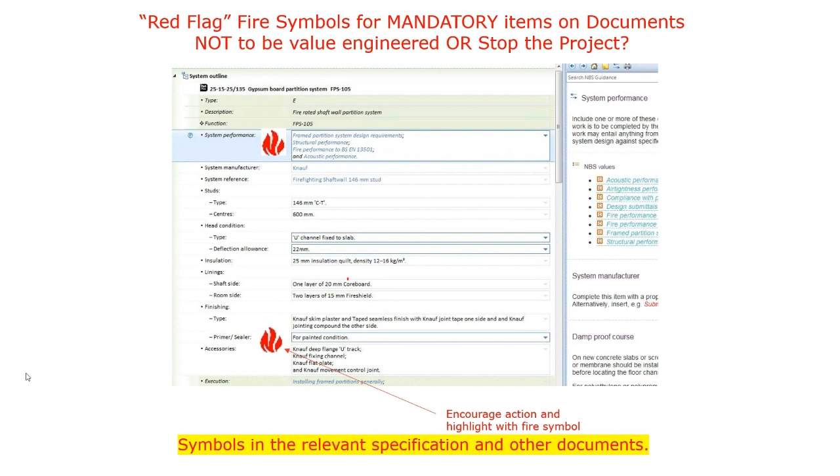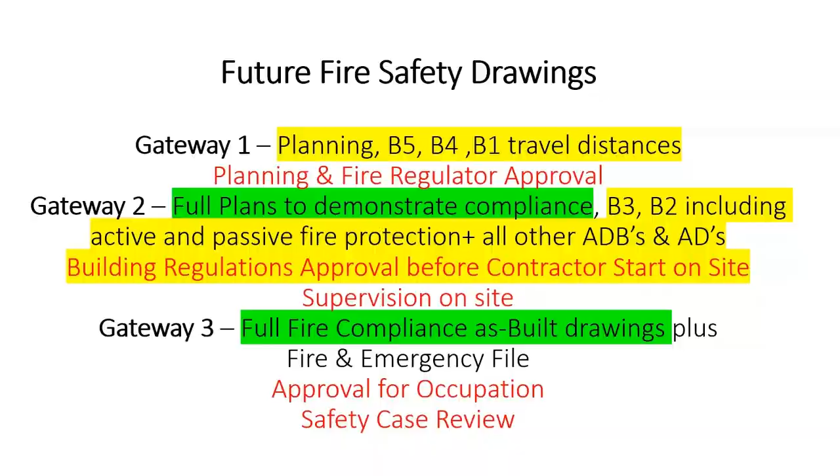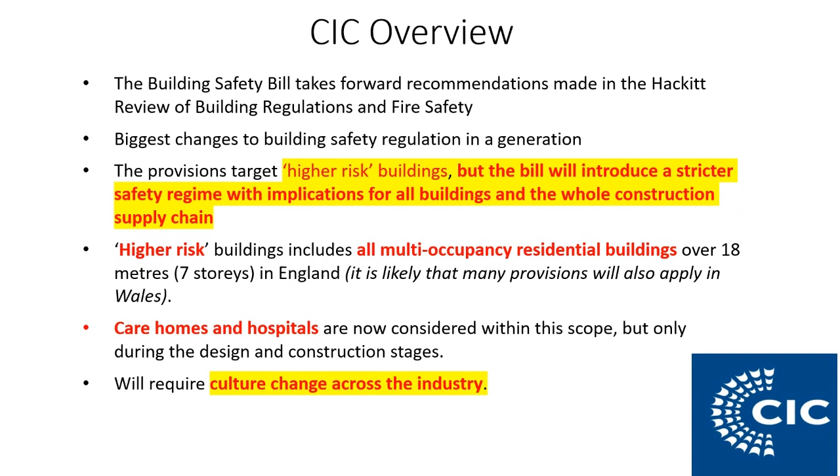So just very quickly here, higher risk buildings: the bill will introduce a stricter safety regime with implications for all buildings and the whole construction supply chain. So just because you don't do higher risk buildings doesn't mean it's not going to affect you - it will. It's this juggernaut that Jane's referring to. And care homes and hospitals are now involved as well, so this is cultural change across the industry.

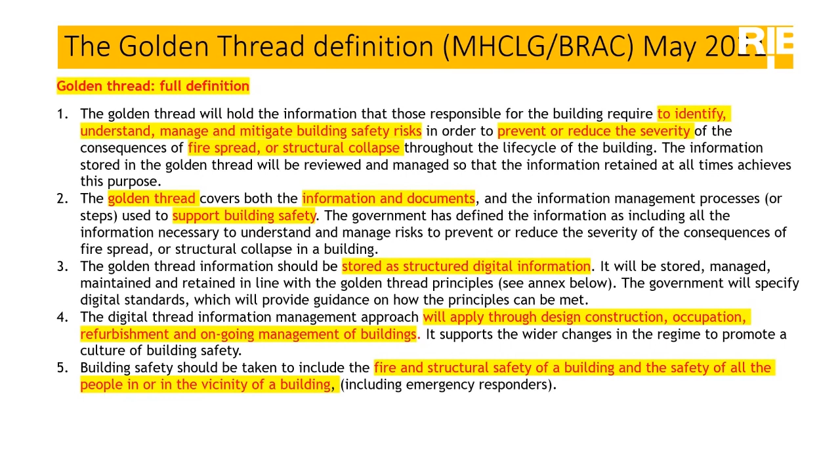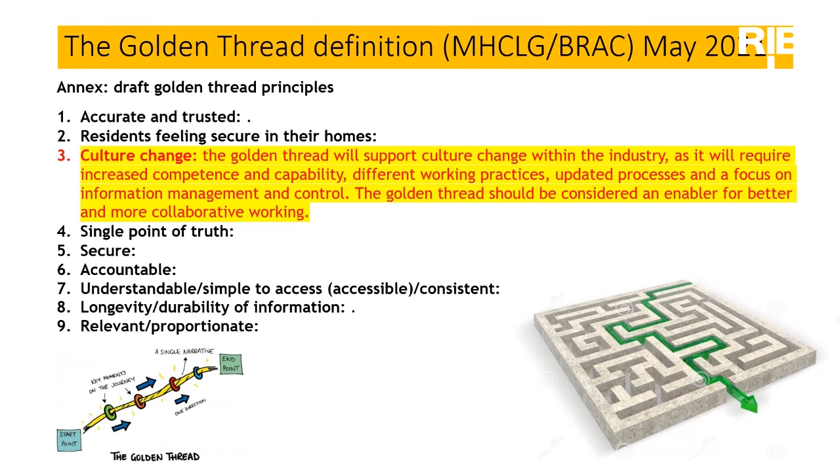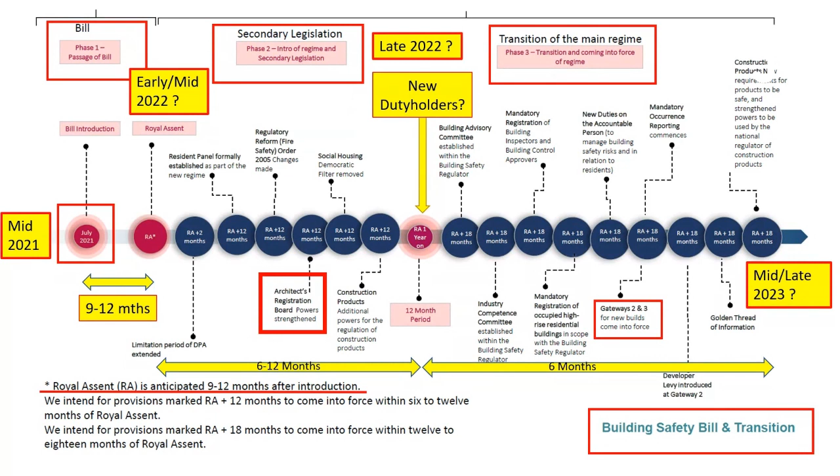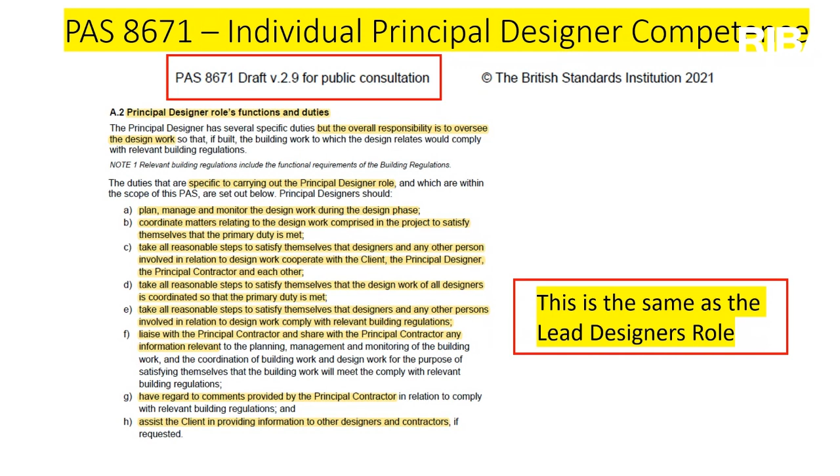I think I'm about there now, if I'm not mistaken. So I think we're on time. Thank you. I think we are on time, Paul. Thank you very much, very knowledgeable and interesting for the audience.

And I think for me, the main aspect of the talk that I think the audience will be grateful for is that very often these different aspects of the design can be added on after the architect has created this magnificent aesthetic beauty. This is really getting to the foundation that we need to bring these principles right to the start of the project. We need to be thinking about how our fire strategy, where we're going to have our compartments, and how we're going to implement that in the design, and not only what impact is it going to have on our design, but how is that going to shape the design. It doesn't have to be a negative thing.